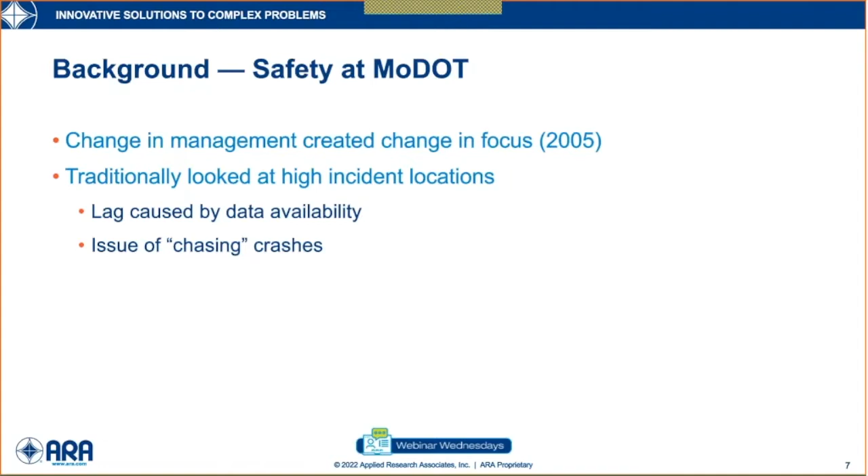Around 2005, MoDOT had a change in management and a bit of a change in philosophy on safety. They wanted to focus more on fatalities and not as much on crash frequency. You can have a lot of crashes in certain areas that don't result in fatalities, but they really wanted to reduce the fatals. I believe at the time, in 2005, they were at about 1,250 fatalities a year on Missouri highways, and they set a goal to reduce that below 1,000.

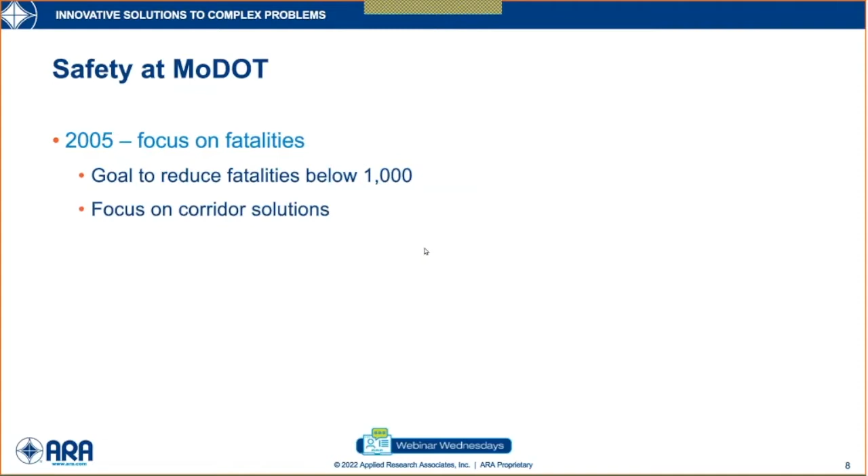The first thing they started to look at was a different philosophy: corridor solutions rather than spot locations. A lot of crashes are random events. You may have a car that runs across the median and hits another car on an interstate, but if you rush out and put up a barrier at that location, what are the odds that it happens there again? The circumstances were just such that it happened, but it may never happen at that location again.

So they decided to focus on corridor-wide situations, like putting median cable down the center of every divided highway. They started putting rumble stripes and rumble strips on the sides of the pavements, went with improved striping, and wherever possible did shoulder additions. The median cable was a big deal because that was something you could do in a year or two with a few contracts. The rumble stripes and shoulders weren't done as individual projects, they were improvements put into policy, so whenever there was a resurfacing project, you upgraded as much as you could. I won't say they did it everywhere every time, it depended on the situation and right-of-way, but wherever you could, you improved them.

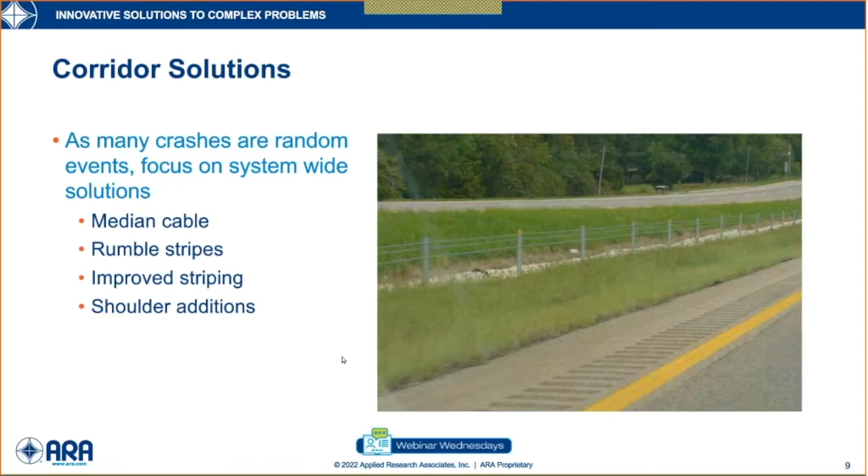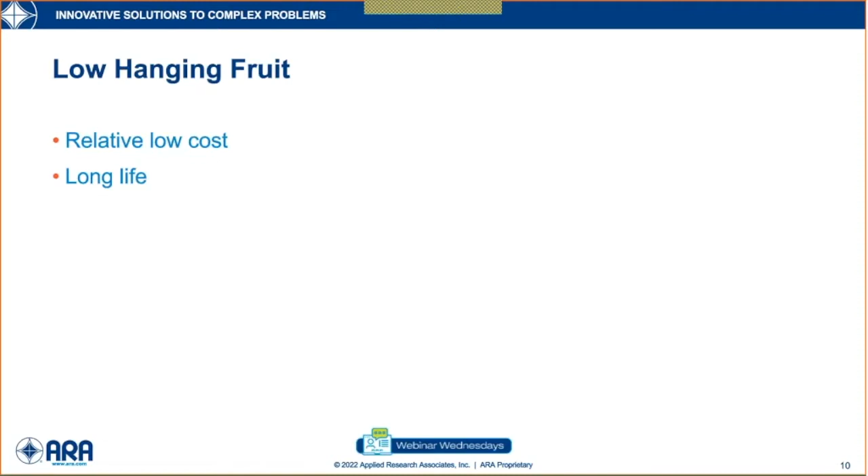You can see an example here where they have the median cable, the rumble strip on the shoulder, and the wider striping. These are relatively low cost and have a relatively long life. The cost on something like a median cable, once it's in place, you don't have to do anything with it until it's hit, and then it has to be repaired, but it lasts a fairly long time. Most of the other improvements were associated with the pavement life. When you put new pavement down, an overlay, you put in the rumble stripes, and they pretty much last as long as the overlay.

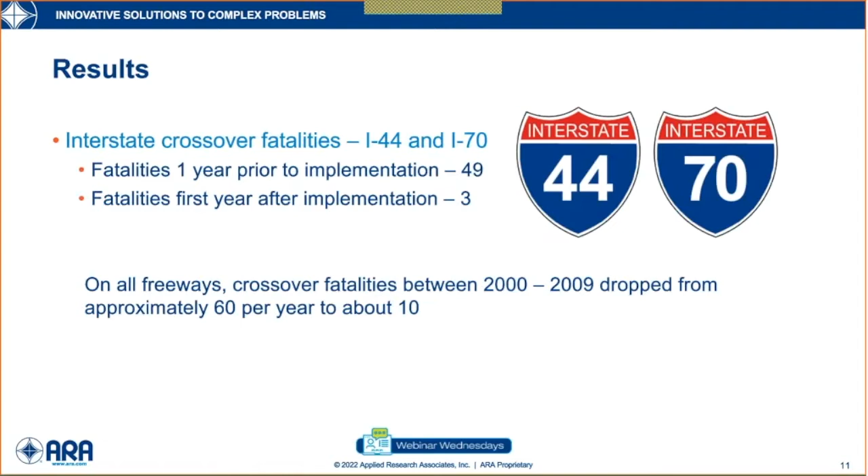As an example, I-44 and I-70 through Missouri, east-west routes, the longest routes in the state interstate-wise, we were seeing an average of about 50 fatalities a year from crossover incidents. The year before implementation, there were 49. The fatalities the first year after implementation dropped to 3 on those two routes. For all freeways, crossover fatalities dropped from 60 a year to about 10 during that 9-year period. Quite an improvement using that kind of facility.

Again, the addition of a 2-foot shoulder and rumble stripes dropped fatalities on 2-lane undivided roads about 45% and dropped disabling injuries about 25%. A nice reward for the effort there.

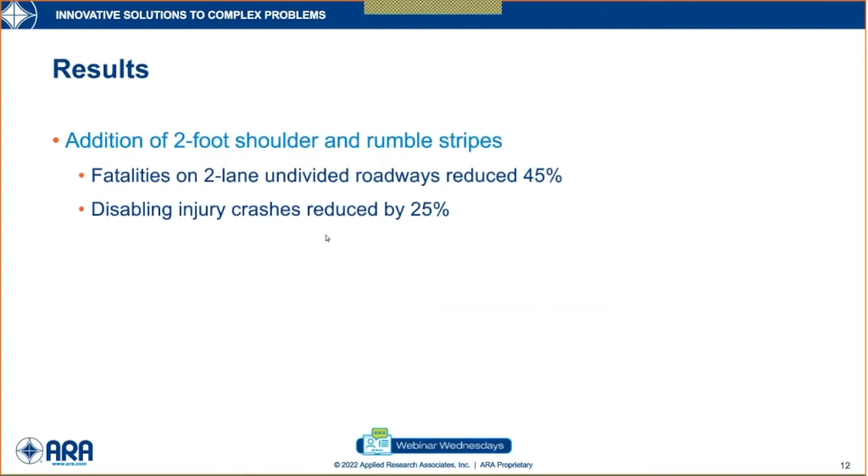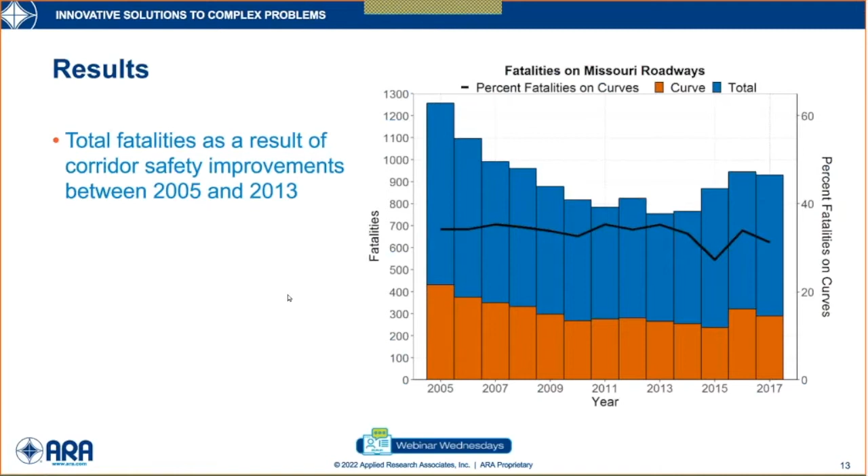I believe it was 2013 when Missouri was granted a project from Federal Highways for Life, using high friction surface treatments on Missouri highways. The purpose of the Highway for Life program was to compare experience using new programs, products, and innovative ideas to decide if they work, and if they work, whether they're the best solution based on cost benefit. In this case, they were comparing the cost of a traditional friction solution, like microsurfacing or ultra-thin bonded wearing surface, to the high friction surface treatments, to see which was the best solution.

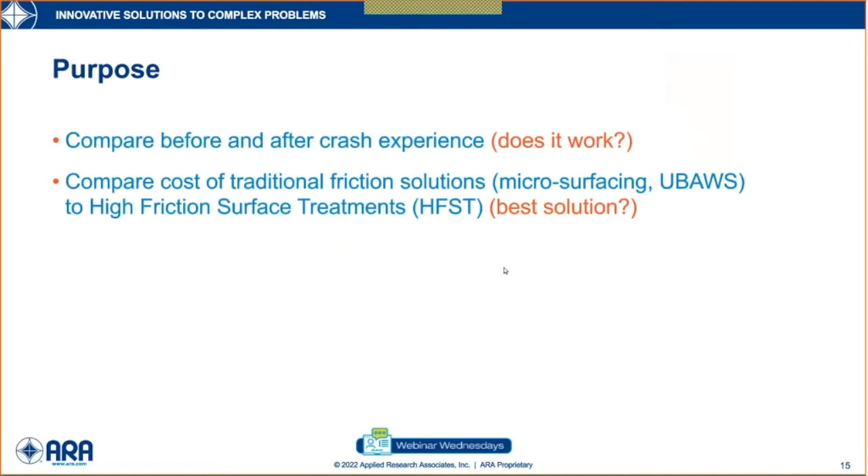Low numbers are very low friction, and they go up from there. The more friction you have, the higher the number. Let's put it that way.

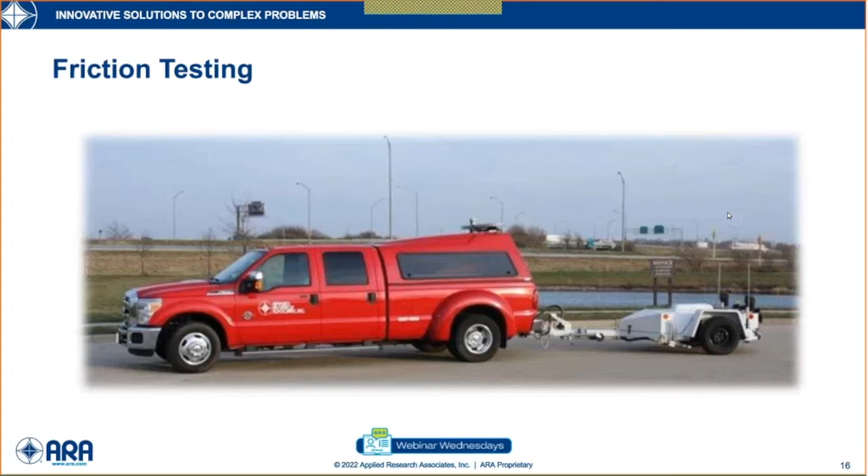The project originally consisted of two projects at 4 locations. The first projects were in Cole County, where Jefferson City, the capital of Missouri, is located. The other two were along I-44 in Phelps County, kind of in the south central part of the state.

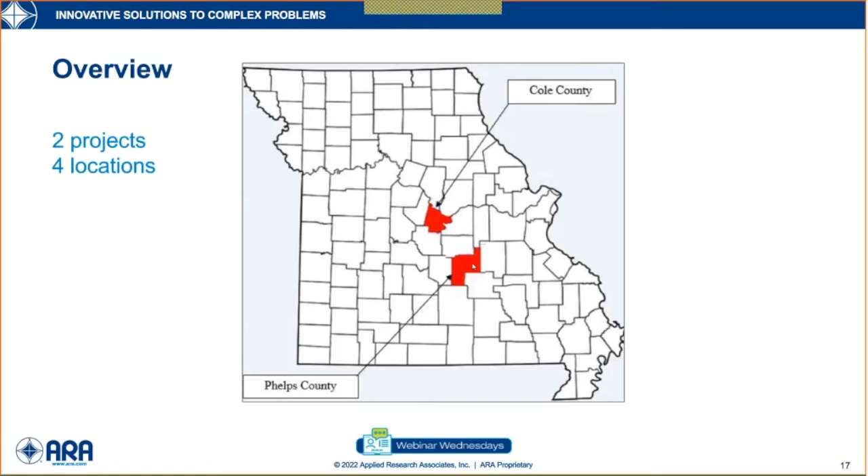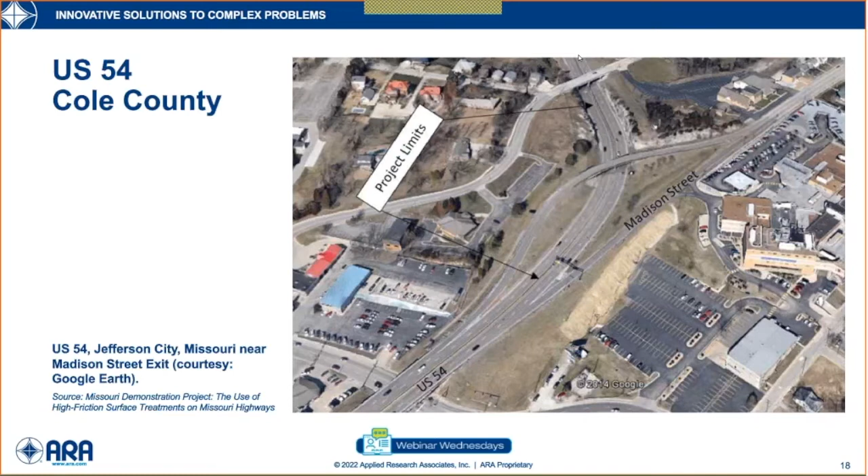The Cole County projects had 2 locations. The first was a sweeping curve just as you enter Jeff City from the west on Highway 54, right at the Madison Street exit. The second project, down the road about 2 miles, was on Missouri 179 where it crosses 54. This was more of a tangent section.

You had a couple of locations where you were having issues with rear end collisions right at this traffic light coming down a little hill. And again at this point, and a little bit on the ramp coming off of 54 onto 179.

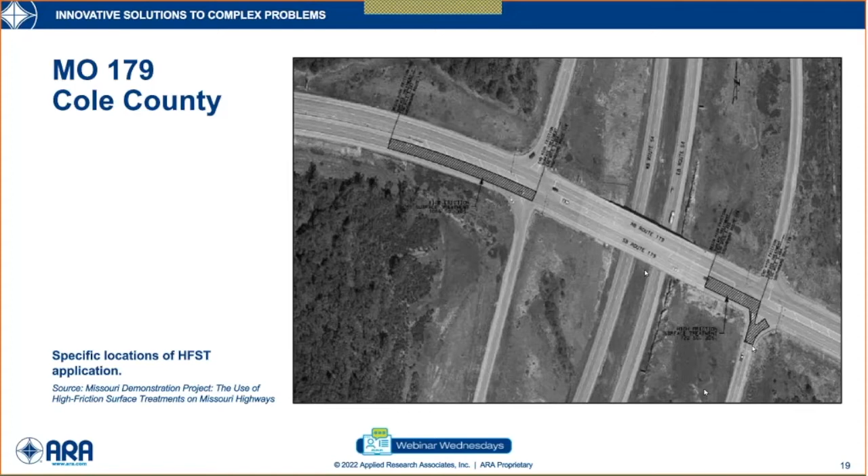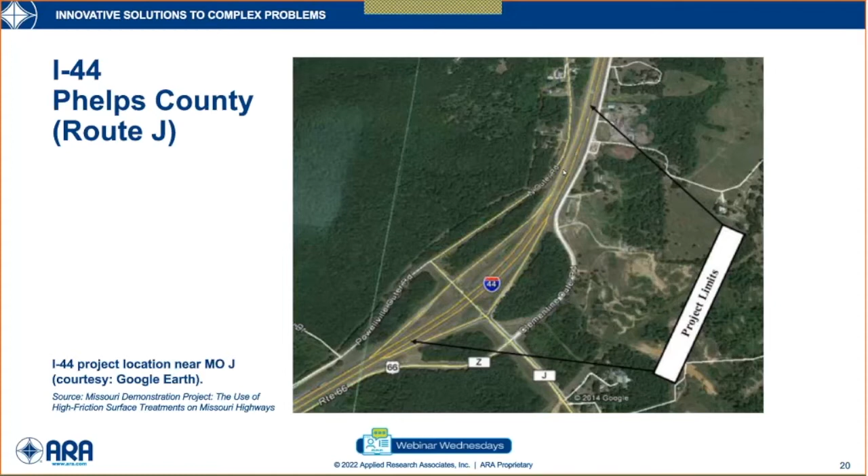The 2 Phelps County jobs were a similar kind of situation. These were interstate projects. One is just a little sweeping curve around the Route J exit ramp. The second one was down on Route V. This is a longer project, and it involved treatment through the areas where we've had some incidents with people entering and exiting 44 from Route V.

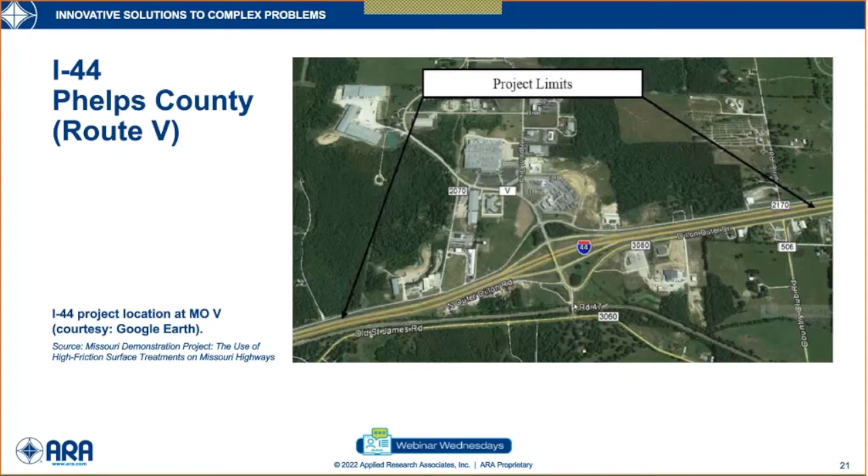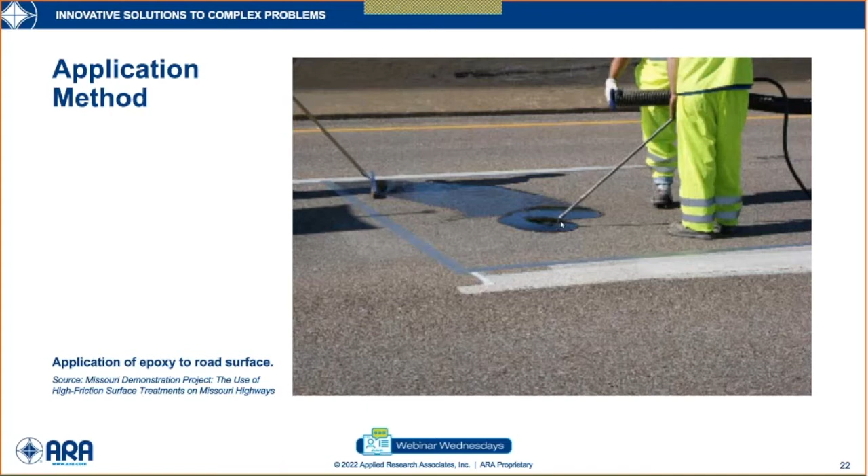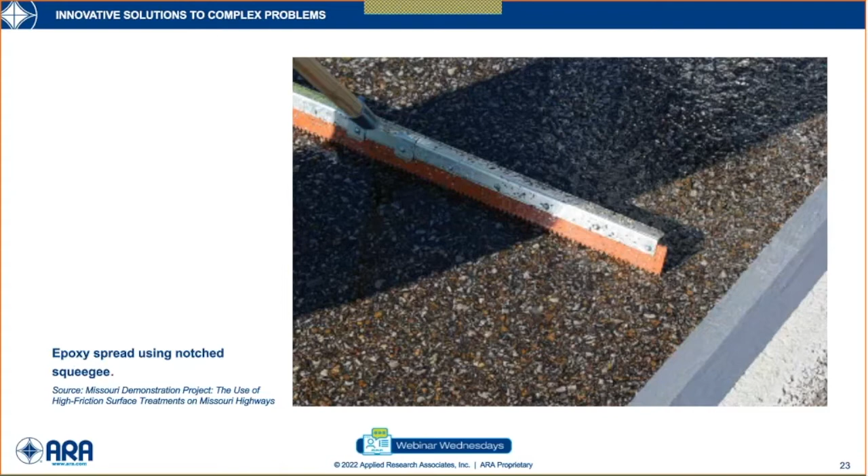Once that's applied, it is evenly distributed over the surface using a notched squeegee to get everything to a consistent thickness. And then the chips are applied.

In this case, this is bauxite - it's the ore from which aluminum is refined. This is one of the methods for applying the chips. I can only describe it as, if you've ever blown insulation in your attic, it's kind of the same principle - high volume of air picks up these chips and blows them. You can see the guy has his hand over the end of the tube, and he's using that to direct the chips down onto the epoxy surface.

It's important that the chips cover all the epoxy, but the depth isn't critical, because once it sets, those are going to be swept up, and anything that's loose is going to be taken away.

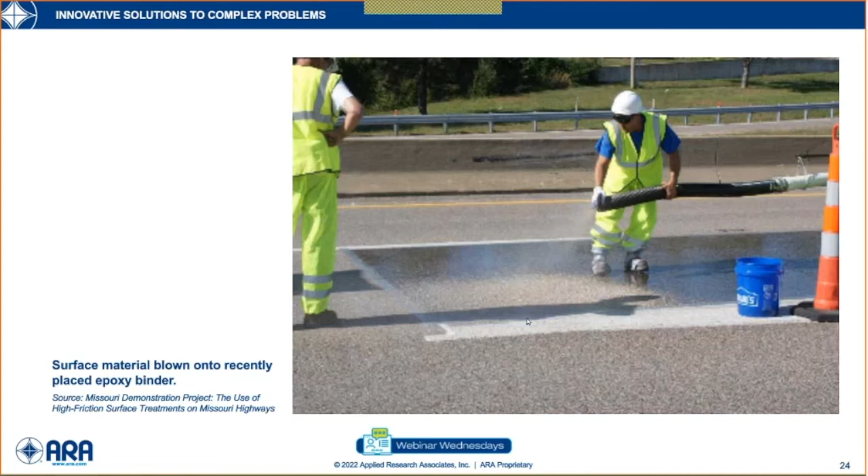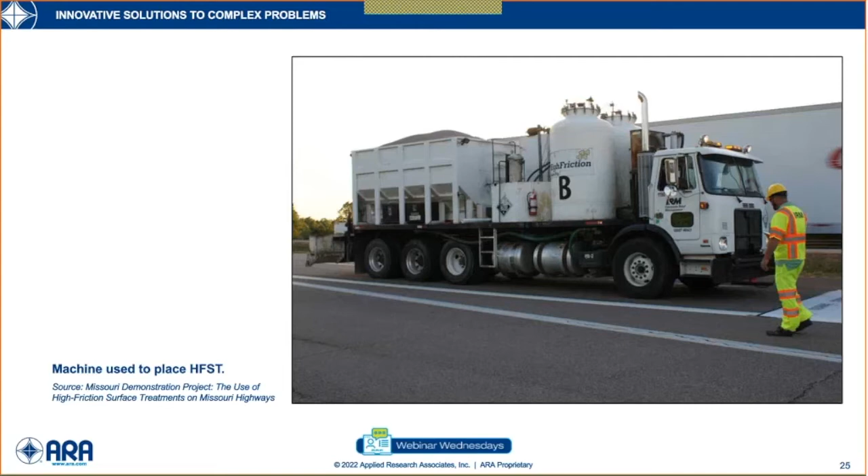The second method is a little more exotic. It's used more for longer sections. You have a single vehicle - here you see the two tanks carrying the epoxy resins. It's mixed in a mixer in the center, and then you have a bed that contains your chips, and it's all put down from this application bar in the back.

The epoxy is sprayed down onto the surface immediately before the chips are dropped. Again, it's not terribly critical how thick they are, because whatever doesn't embed in the epoxy is swept up. You'll see here a little bit of a gap where the guy's maybe not driving as close to the line as he could, but there'll be a couple of people following the truck with buckets and shovels, and anything not covered will get covered by hand.

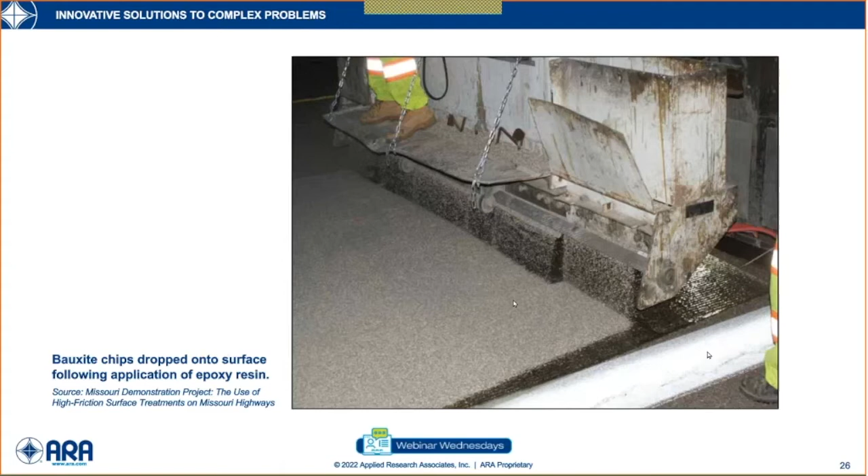The resulting surface is a really nice looking surface. The chips are all about the same size, and it just makes a nice looking product once it's applied.

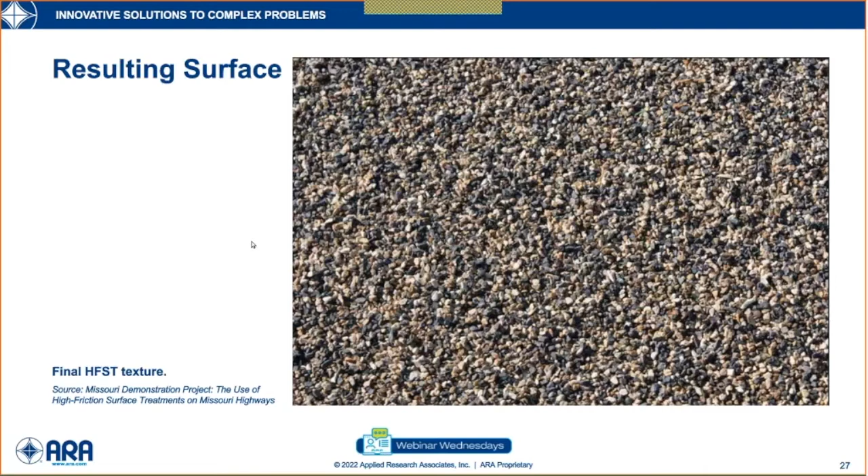As I said, the binder is all 2 component epoxy, and bauxite was the aggregate used in all of these projects. Bauxite, when you heat it, becomes very, very hard. On the Mohs hardness scale, a diamond is a 10, bauxite's a 9, so it's a very hard aggregate. You get very little wear.

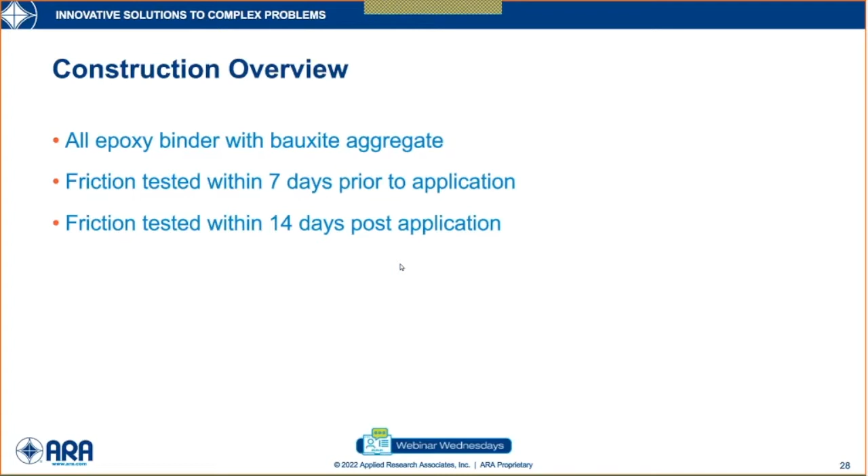The friction test was required within 7 days of application, and then another test was required within 14 days post-application. There were some specs on what that post-application number had to be. I'm not sure, I don't remember what the minimum was, but it was always exceeded on these projects.

The friction prior to the application was in the mid-30s. After the application, we were seeing numbers in the mid-80s, and it remained greater than 70 until the project was replaced about 6 years later. Now, excuse me, I'm talking specifically about the 54 Cole County location here, because that's the one we have the most information on.

So prior to the application, I believe in the 3 years prior, there were right at 100 crashes. There were 32 the year before application. Post-application, we only had 1 year's data before the report was completed, but that had dropped to 5.

And I can tell you that's a conservative number, because I looked at the reports, and 2 of them, I believe from the description, actually occurred on the ramp prior to the application of the treatment, but they were logged to the main line by the reporting agency, so we had to use them there, even though I don't think that's where they occurred.

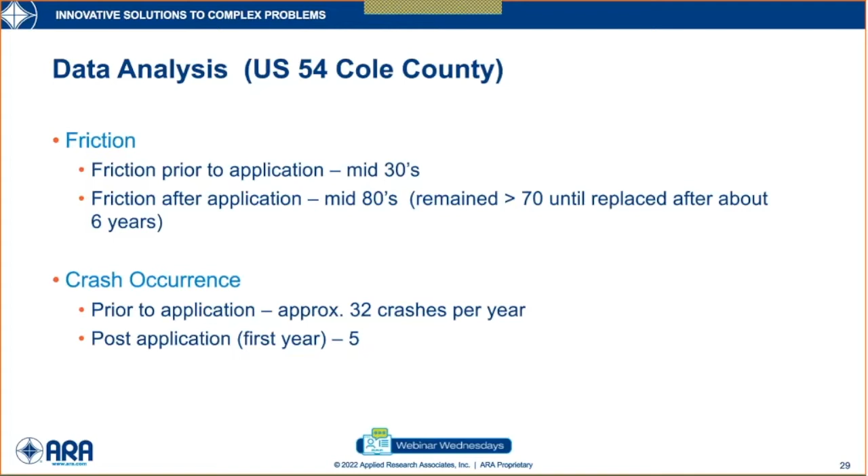And one of the other accidents, I talked to the highway patrolman, and he said in that case the crash occurred when somebody went through that curve at over 100 miles an hour. So I'm not sure there's enough friction in the world to save you from that one.

As far as the cost is concerned, the way we approached this was to look at the National Safety Council estimates. They have estimates for the costs associated with each type of crash, whether it's fatal, disabling injury, or property damage. And we had the information from the types of crashes that were occurring at these locations. So when we looked at that, we came up with a weighted average cost of about $36,000 per crash.

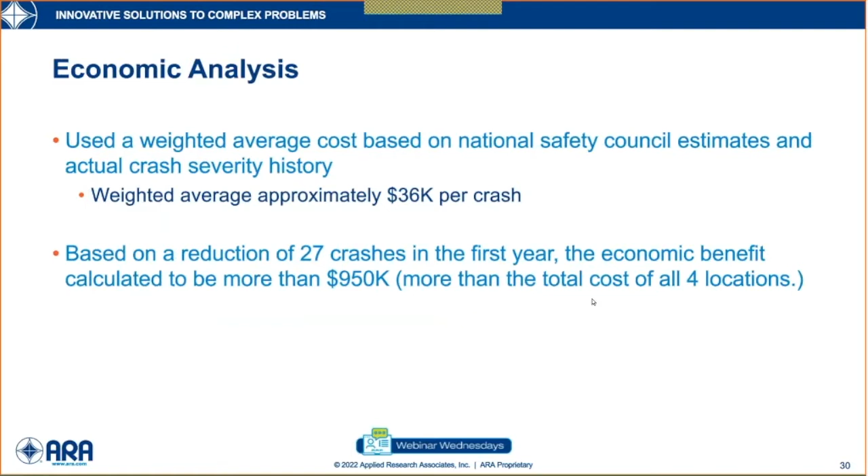And when you look at the reduction of 27 crashes in that first year, the economic benefit calculates out to be more than $950,000, which was more than the total cost to apply the treatment at all 4 locations. So that's a pretty good return on your money.

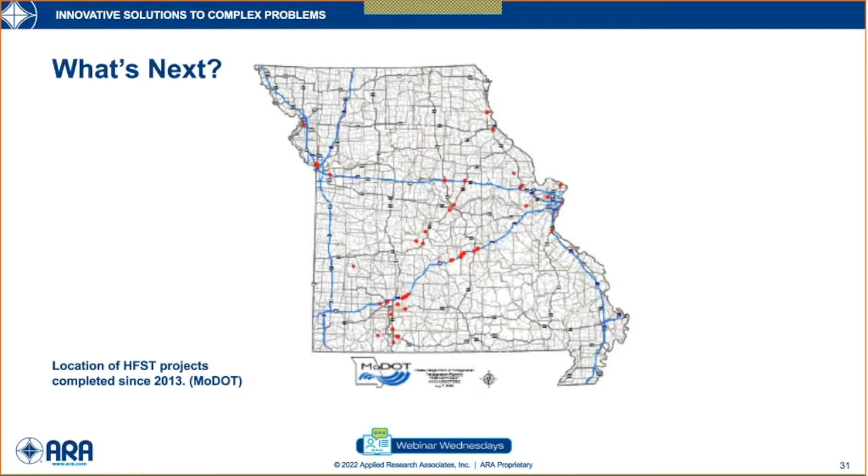So once word kind of got out that this stuff was available and how well it worked, MoDOT started using it a lot more actively at different places around the state. It's kind of hard to tell on this map, it's a little fuzzy, but all the red dots are locations where the treatment was applied after that first project in 2013.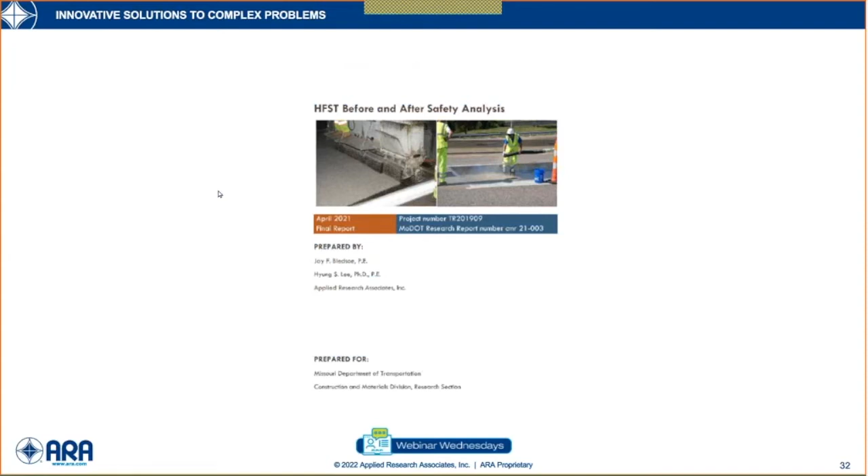At that point, Missouri decided that, well, now that we have more information, let's see if we can do another project to analyze the safety before and after on these locations. That project was finalized in '21. ARA was also the contractor on that. And the purpose was similar in some respects to the Highway for Life program: is this effective where it's placed? Does it reduce track crashes? And is there a high benefit to doing so?

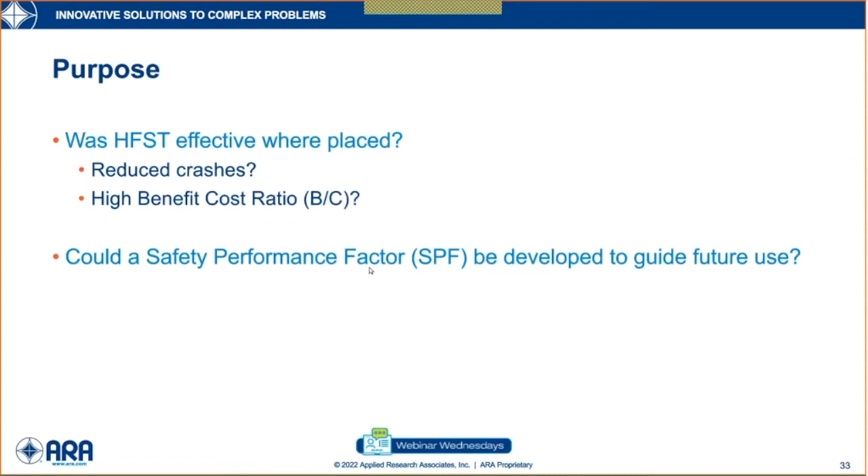It also threw in another factor, which is, could you come up with a safety performance factor to help guide the use in the future, where we weren't just doing it based on hearsay or just a number where there was assumed to be a problem.

The project that they gave us, there were 27 projects statewide, which turned out to be 67 locations. And I thought, oh, that's a lot of locations, that'll be a pretty good data set to work with. Then as we broke it down a little more, some of those locations had 2 or 3 segments in them, as they went around S-curves and whatnot, they would be broken into 2 or 3 segments. And so we ended up with 95 individual segments, which again, we think, oh, that's going to be good, that's going to be a lot of data.

But then we started breaking down the segments by type, and we see first that 76 of them were on the main line, but 19 of them were on ramps. And ramps are troubling for a couple of reasons. First off, at that time, I believe it's changed now, but at that time, crashes were only reported or logged to the ramp, not to a location along a ramp. And in some cases, the entire ramp was treated, but in others, maybe only the first couple hundred feet where the ramp exited from the main line or before it entered back onto the main line was treated. So anything that happened in between those 2 points was also thrown in the mix, so it made your data a little less accurate.

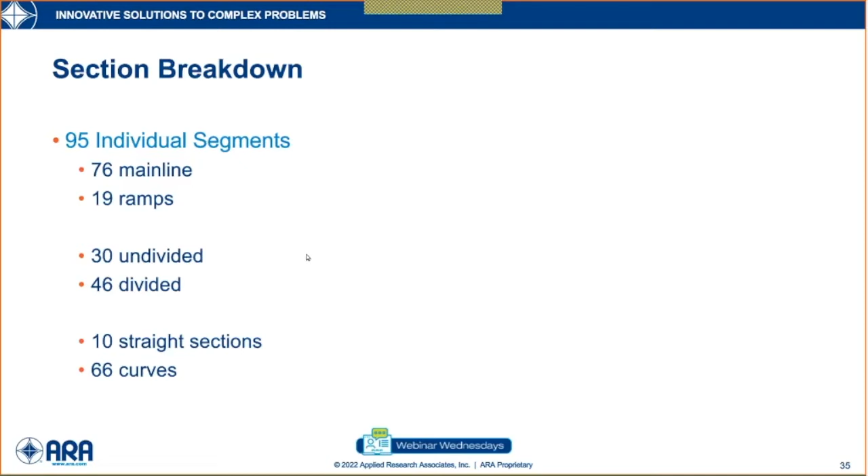A further breakdown: 18 of them were on interstates, 25 on U.S. routes, 17 Missouri routes, 15 RTs, and 1 business loop. For those unfamiliar with the MoDOT system, they have 32,000 miles. These routes, especially the RTs, are probably county roads in most states.

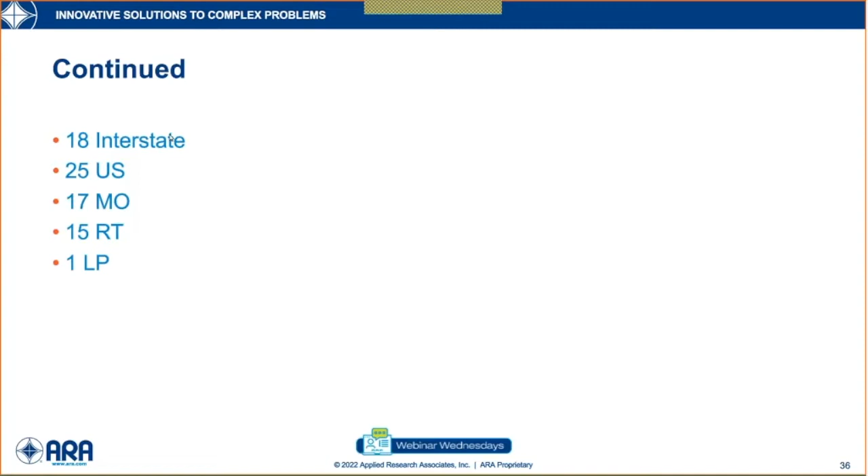So the variation in traffic between these interstates and these rural routes is pretty dramatic. This slide is probably a little bit out of place, but we'll do it here anyway because that's where it is.

When we got the list, we started looking at it, and we needed to verify the locations where the treatment was and get exact log miles and whatnot before we asked MoDOT to supply a lot of data for the analysis.

So they have an automatic road analyzer, an ARAN. They've had them for years, I think since '87, and I think they have two now. For those not familiar with it, it's a data collection vehicle that's part of their asset management program. They can collect rutting, roughness, IRI, and all the geometric data is collected.

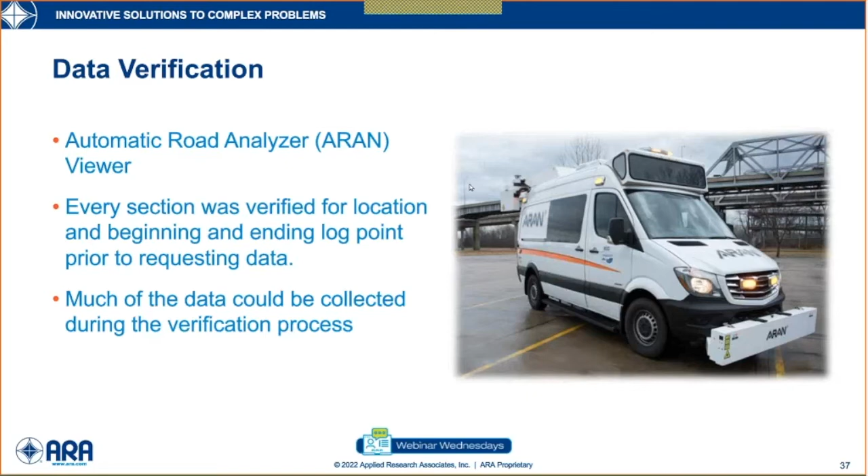They also collect video for processing and surface distress data. For what we did here, a lot of what we used was the data from the camera sitting above the rear view mirror, which gives you a right-of-way view of all the roads they travel. They collect all 32,000 miles every year, so they have a nice set of data to look at.

The data you get from that is available through what they call their data zone. When you open that product up, you'll get a map of the state, and you pick where you want to look. So we had these locations and descriptions, and we could zoom in to a specific location like this, for example.

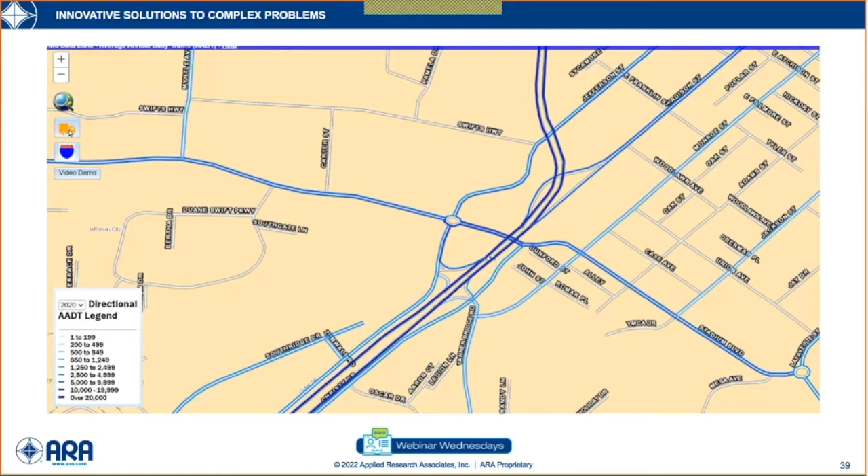Here's your Madison Street exit off US 54. This is the curve that we talked about earlier. You go up here to the left and click the little yellow truck, and by magic, here you are at the Madison Street exit. You can see the exact point the treatment starts, drive down the road, and see exactly where it stops.

You can do that by year and go back several years. I don't know how far back you can go, but it's several years. So if you want to see what the condition of the road looked like before you applied the treatment, you can do that.

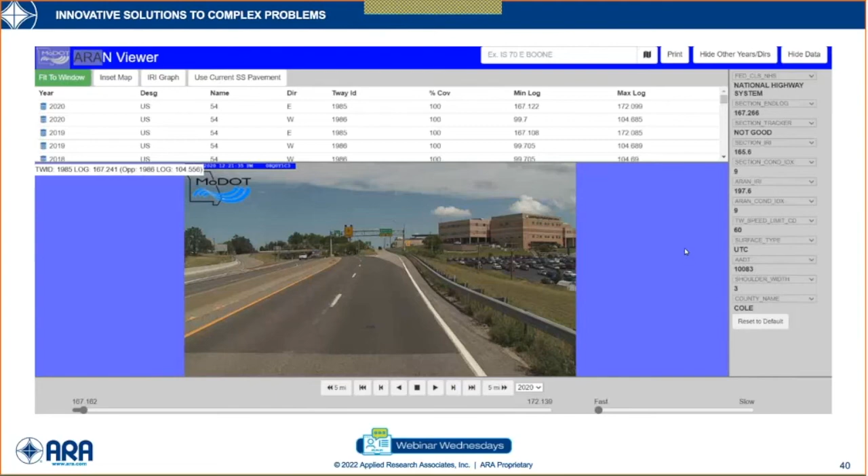In addition, some of the other data we wanted to look at was available on this drop down. All these little tabs have drop downs where you can select other types of data. For example here, we've selected speed limit, so we can sort these out by speed limit, by surface type, get traffic volumes, conditions—lots of information available on these screens.

In addition to that, through the miracle of Google Earth—as I said earlier, I think MoDOT doesn't have a friction truck, but ARA has a contract providing friction services for MoDOT—we could take our GPS tags for the numbers and look at, again, exactly where the treatment starts and exactly where it ends.

This is what I was talking about earlier, on this ramp, where only a portion of the ramp was treated. But here you can see where the treatment is applied the full length along the clover part of the cloverleaf. So we were able to see exactly what we were looking at as far as the numbers were concerned.

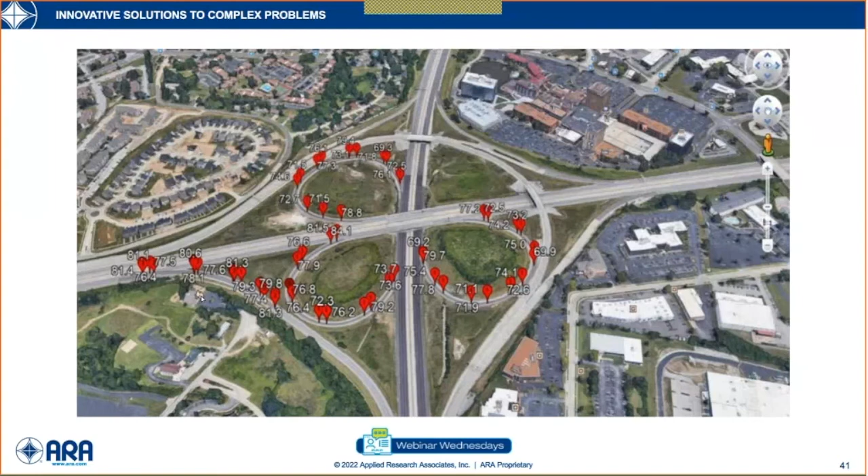So once we had our limits all established and whatnot, we asked MoDOT to supply us with crash information, and we found 1,829 crashes that were identified within these project limits, both before and after the treatments were applied.

We had all the detail on those as far as whether they were fatal, disabling injuries, or property damage only. They also supplied all the data requested on roughness, rutting, cracking, curvature, super elevation, AADT—the whole shebang.

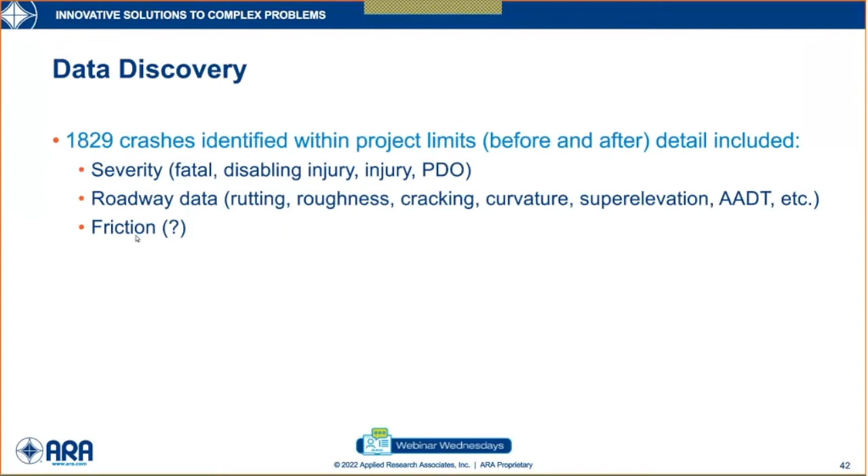This is where we were a little shaky here on the friction. There was very limited friction data prior to the application of the high friction surface treatments that we were looking at. Only 8 of the locations out of the 67 had data prior to application.

So we used what we had, and that gave us a before estimate of about 35 on those locations, and an after estimate of about 78. So those numbers are pretty close to what you saw on the Highway for Life program. That one was a mid-30s before and a mid-80s after, so it was a little bit higher.

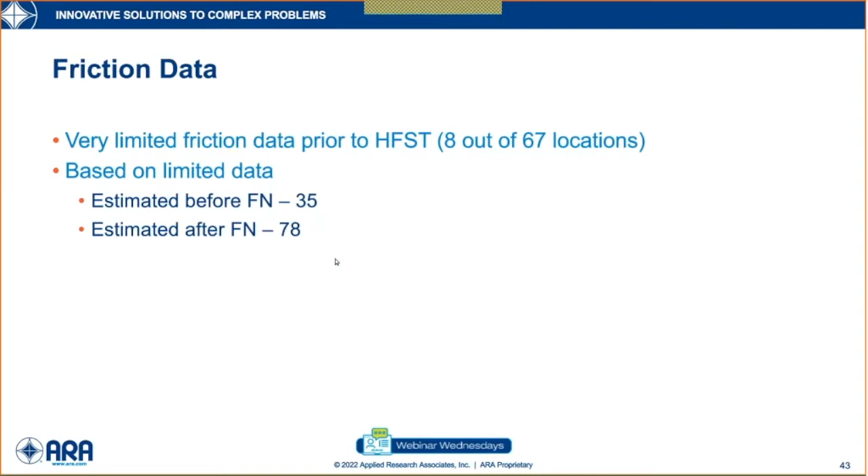But I will say the average on the after was a little more variable when you had this many projects. We had a small sample that had multiple years of data prior and post, but we took what we had, and here's an example of a couple of the locations that we looked at.

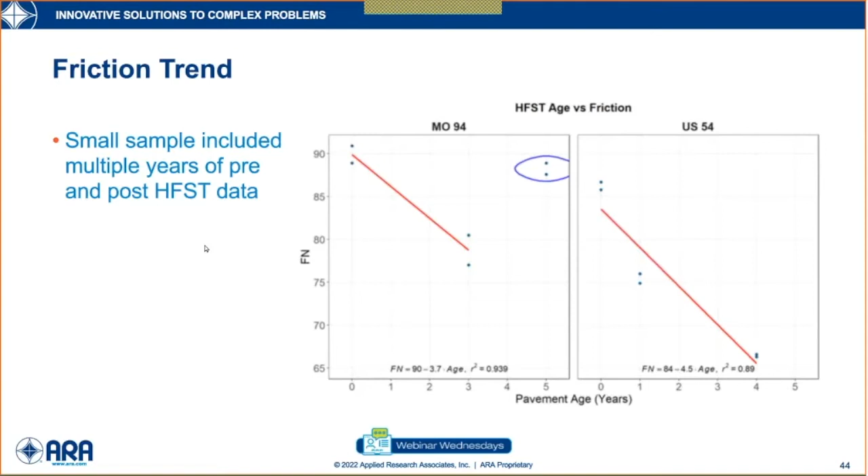We were able to get a rough estimate of how long the friction lasts, and last is kind of a bad term too, because there's really no bottom cutoff for it. But we wanted to see what the average drop in friction number per year was. Using those curves on all the data we had available, we saw an average drop of about 4 points a year.

So again, what's the life? That's a tricky thing to say, but if we assume that starting point of 78 that we saw as an average, and you assume a 4-point drop a year, in 7 years you're still over 50, or about 50. And I don't think anybody's going to argue that 50 is a pretty good number.

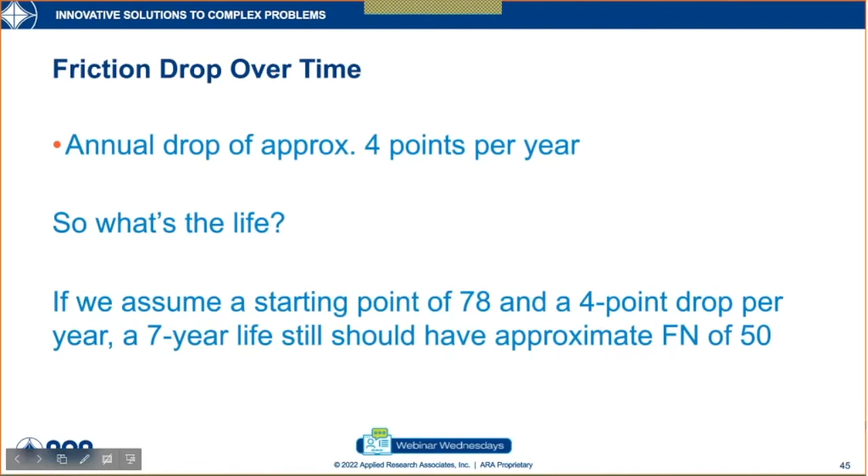We assume the 7-year life because, in a lot of cases, that's probably the average life of your overlays. Some places longer, some places shorter, but if we use that for an average, we thought at that point something else is probably being done to the pavement regardless, because in most cases they're not new when you put them down anyway.

So of the 1,829 crashes we saw, 1,425 were before, 404 after. So you saw a 72% reduction, but you have to be careful here because not all the projects were placed at the same time. Some of these you saw several years with the treatment in place, others less than a year. So that's a little bit misleading, but I'll show you in the future how it's not that bad an assumption.

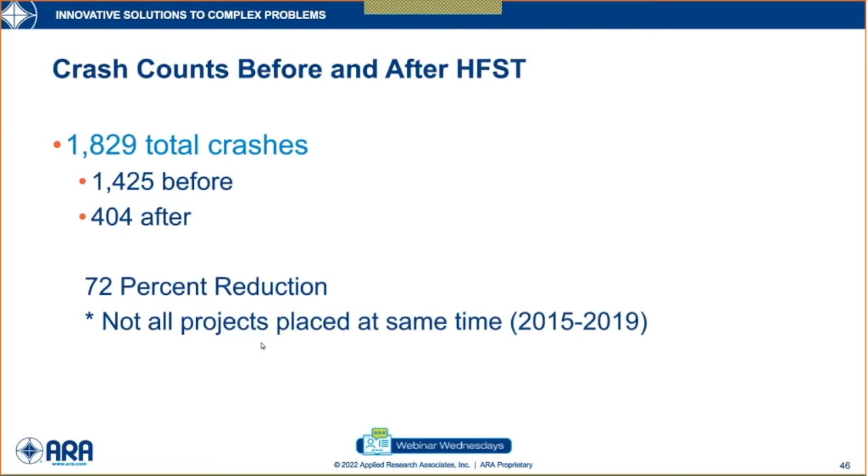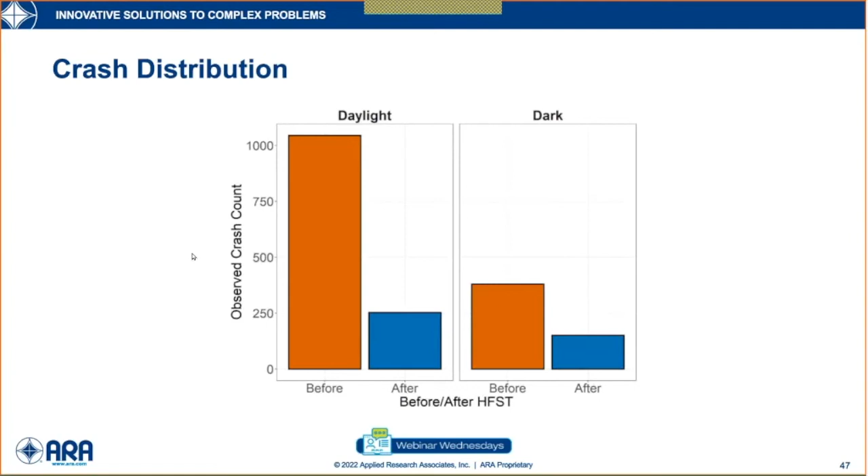The distribution, that's another nice part of the data set. We could look at the distribution between daylight and dark and the observed counts before and after, and you see a pretty good reduction both ways, but more of a reduction in daylight hours.

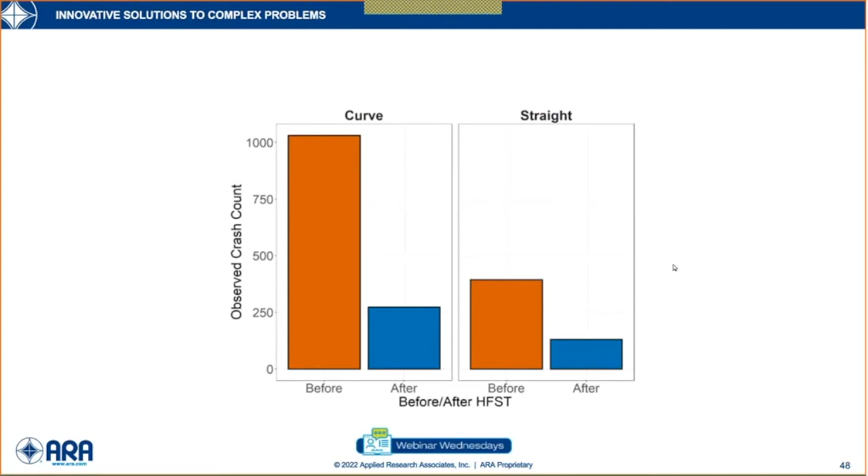Straight versus curved, again, you've got a lot more data here than you do on the straight sections, but again, you'll see a much greater reduction on curved sections. Dry versus wet, this is one of the biggies. The reduction on wet surfaces, as you would expect, was significantly better than on dry surfaces.

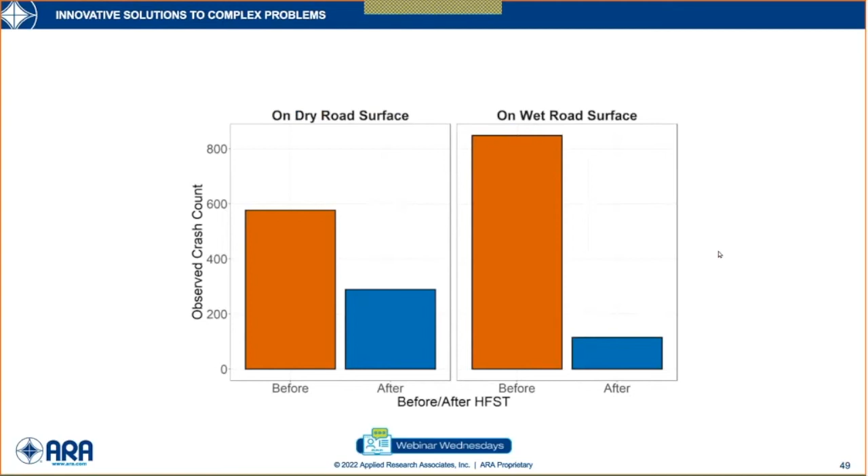As far as the benefit cost analysis goes, we used the same method that we used in the Highway for Life program. We did a weighted average cost based on MoDOT cost factors and calculated based on the distribution of severity on each of the locations. We calculated an annual crash cost for each section, not overall, but for each one, and assumed a 7-year life.

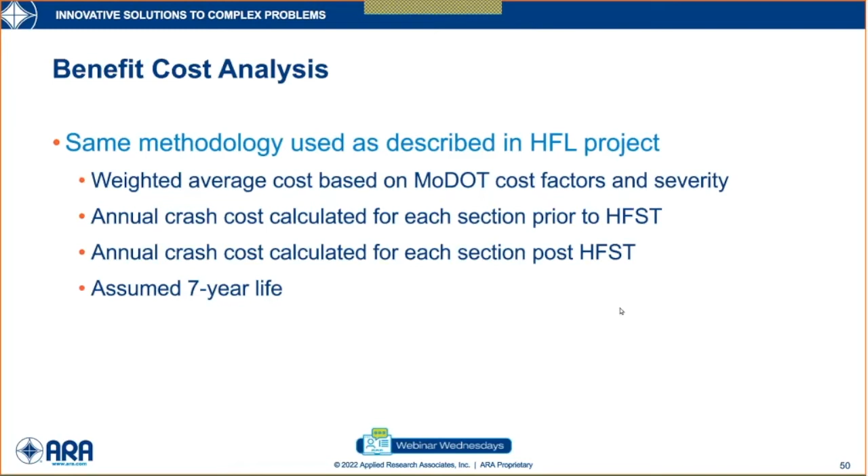So of all the projects, these are all the jobs that were done, and some of these, again, had more than one location, but these are the jobs. You can see that for the most part, there were some pretty nice reductions after the application of the treatment. But you can also see that some locations had significantly higher numbers of crashes before the treatment than others.

Some of these, where you get down in these areas, had very few crashes to begin with. These would be some of those really low volume roads. So you see a reduction, and maybe that's a 50% reduction, but there's not that many crashes. So when you go into looking at your benefit cost, overall it makes things a little more complicated.

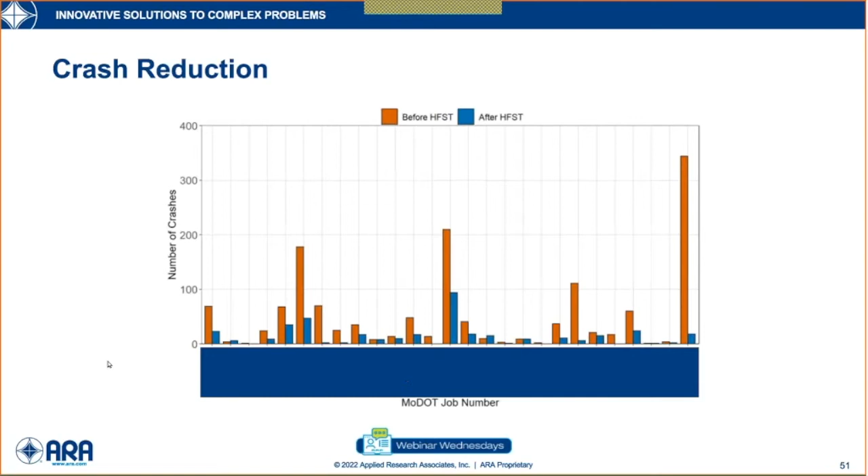Now, we've talked about the costs quite a bit, and I haven't really said much about how that was calculated. These are the numbers that came from MoDOT that they used in their safety program, and they've assigned these values to different types of crashes based on national data. So you can see property damage only accidents don't cost too much compared to the more serious accidents.

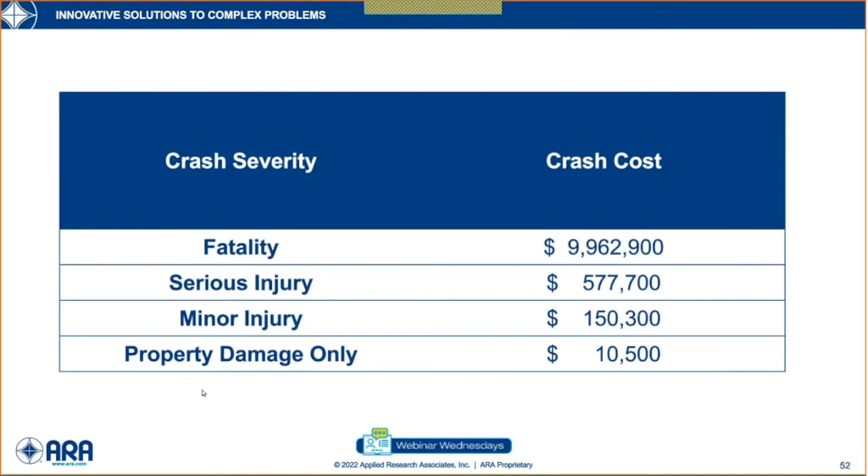Again, it depends on the location, but getting an extra one of these into your mix can make a big difference in your benefit cost ratio if you have a low number of crashes. And that's kind of what you see here.

This is your benefit per year in millions. So some of those where you had a very high number of crashes, you get a pretty high benefit. Some of these where you had very few crashes in the first place, we actually saw a negative benefit. And that can be just the difference between throwing in one extra disabling injury or injury crash to the mix when you have a very low number in the first place.

I think we all realize that the difference between an injury crash or a disabling injury crash and a PDO may be nothing more than whether the person in the vehicle was wearing a seatbelt. One person not wearing a seatbelt that has a disabling injury on these low volumes can really throw your benefits into a mess.

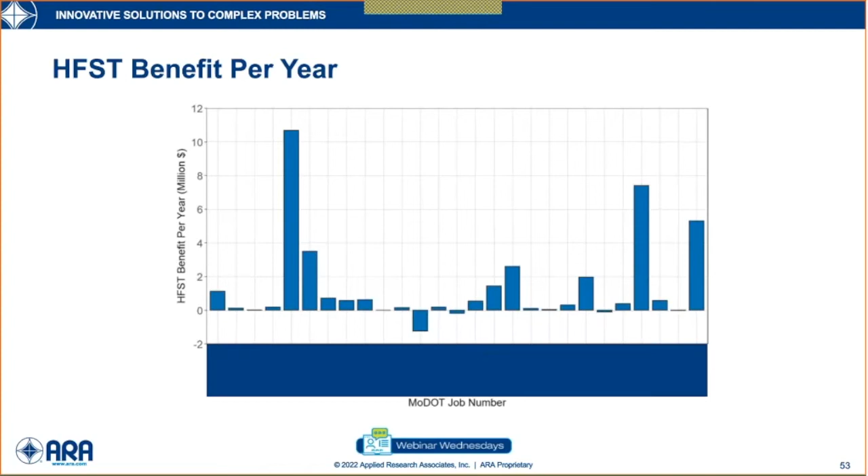So the total cost on this of all the high friction surface treatments was about $4.6 million. Some of these were individual projects just to do high friction treatments. Some were done in conjunction with resurfacing and other types of projects, but pulling out just the cost, we came up with $4.6 million.

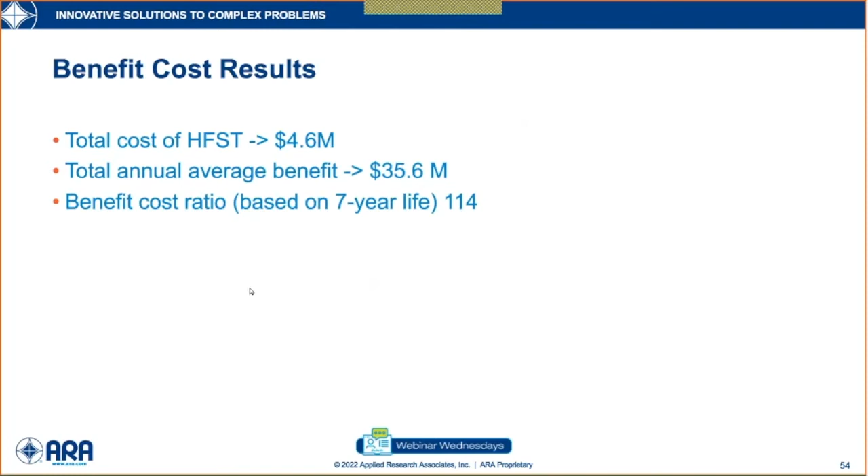The average return, or the benefit, turned out to be $35.6 million, which gives you about a 114 benefit cost ratio, assuming a 7-year life. Once again, not a bad return. What you saw before, it's kind of spread all over the place, but that's the average.

Now comes the fun part: safety performance function. This is kind of a way of using an estimate to analyze what kind of benefits you would have if you were to apply a certain treatment at a certain location.

The recommended procedures that AASHTO and FHWA use require large amounts of network data, and that just wasn't available for MoDOT. So we first looked at a generalized performance function and tried to understand the effects of friction as well as the other pavement, roadway, and environmental factors. But again, we had limited data.

There's a lot of things that could affect these. There were a lot of things being done at the same time as some of the treatments — other improvements, as we talked about earlier, like the addition of a shoulder or chevrons or rumble stripes, that kind of thing. So that made it a little more difficult as well.

So we dropped down to a very simplified performance function that included all of the section data and had a limited number of variables.

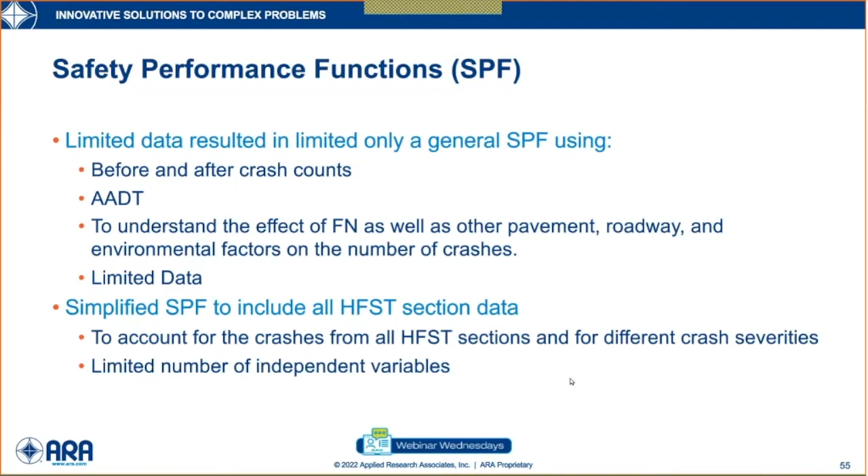Based on the data we had and the general SPF, we basically used a ratio of before and after crash counts and segmented it by AADT, segment length, and speed limit. Friction wasn't included as an independent variable because we just didn't have enough before data to really do that in a way that made it meaningful.

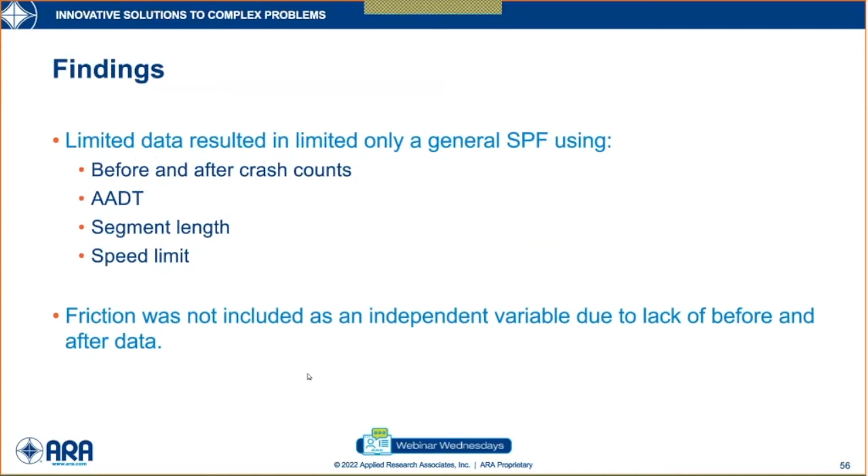So we developed a generalized SPF for roadway and tangent sections. You can see here on dry surfaces you get a benefit from the expected counts, but on wet surfaces you get a much more dramatic estimate of drop.

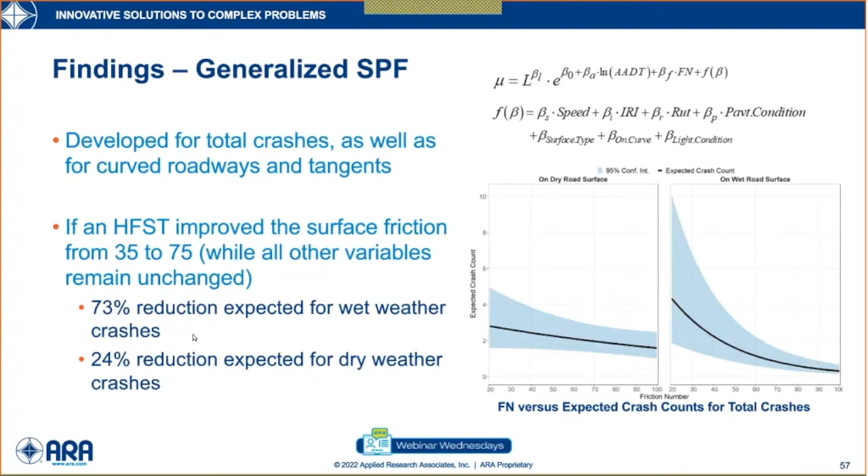If you use the numbers we had from our averages before and after, assuming all the other variables remain unchanged, we saw about a 73% reduction — expected reduction — for wet weather crashes, and a 24% reduction for dry crashes.

This one, I'm not going to pretend to understand the statistics that go into it. We have very smart people that did this part of the project, so I'm going to go into this in very little detail.

I'm just going to tell you that the empirical Bayes method was used to try to take out some of the unpredictable nature of the crashes, kind of like we talked about a while ago, where you have some very low volumes, some very high volumes, and one or two crashes of a different type can really throw those counts out of whack. So this is kind of a way of doing a weighted mean for your data.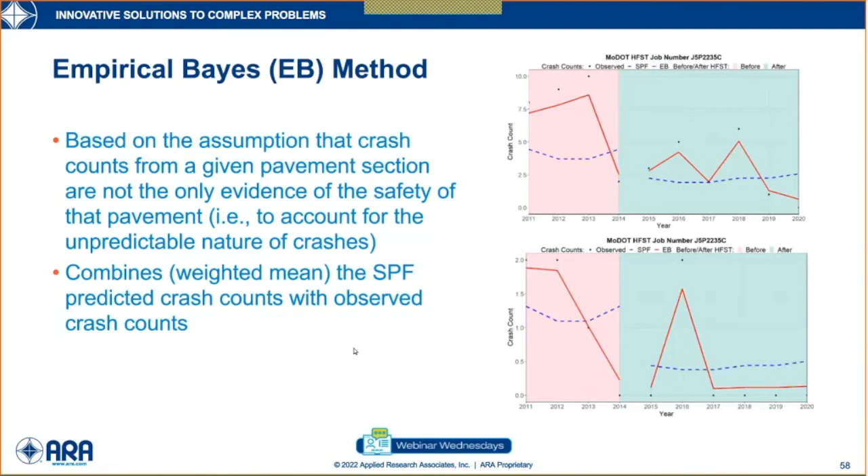If you look at some of these charts on your right, the little dots are the actual data observed. This blue line is what you estimated from the performance function, and then after you use the empirical Bayes methodology, you get something that's kind of in the middle — it kind of averages out those highs and lows, if you will.

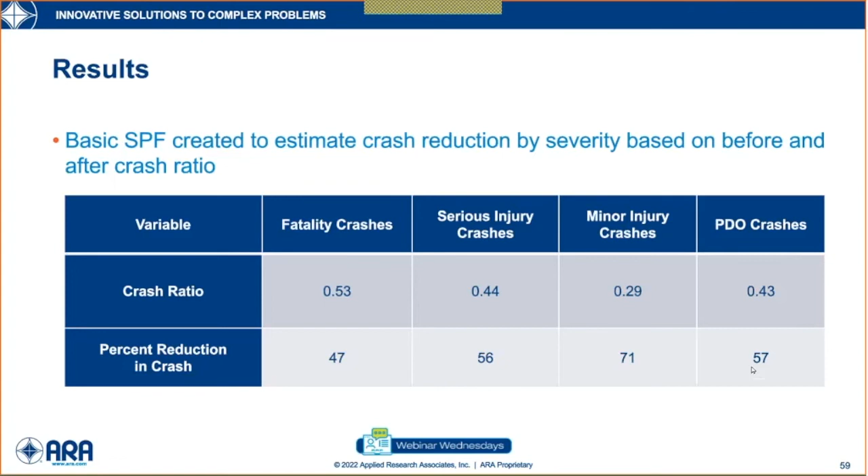So the results come back to this. We were able to come up with ratios or percent reductions in crashes that were estimated based on what we saw in the data, and we see a 47% reduction on fatal crashes.

56% reduction in serious injury, 71 minor injury, and 57 PDOs overall. So when you look at that from a benefit cost ratio, and assuming that 7-year life on all of these projects, your benefit cost ranged from a little over 2 to 409, with the average being about 60. And this is from the empirical Bayes method, where you take out some of those highs and lows.

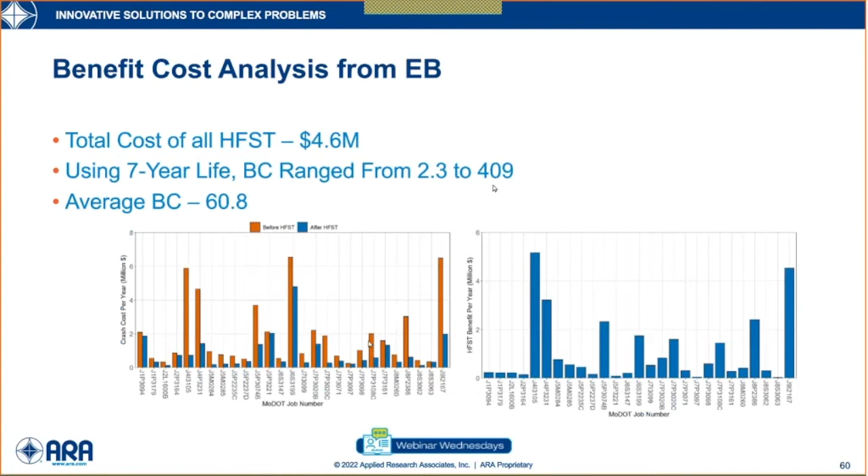So what did we really learn from this? All the treated segments exhibited a high friction post-application, the average greater than 75. That's high. It's hard to say what is good and what is bad with friction, but I can tell you that when you get up in the 75 and 80 range like this, it's enough to pull the tread off your friction testing tires.

That's good. I don't know that I've ever seen numbers higher than some of the numbers we saw in these projects. It's a very good surface. And if you look at the overall benefit cost, you're doing very well. You're doing, depending on which methodology you look at, from 60 to 114 on your benefit, which is again pretty good.

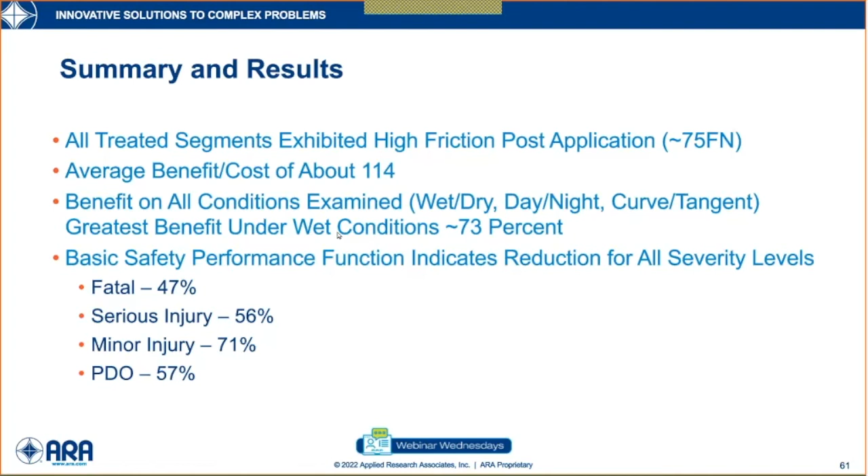And what you're really looking for is a reduction in fatalities. So that was almost 50% there. In general, you're going to see a better reduction in wet than dry conditions and on curves than tangents, and that's to be expected, kind of common sense. But your basic safety performance function would indicate that you're going to see reductions in fatal crashes by about 47%, serious injury 56, minor injury 71, and PDOs of 57 in locations where you use this treatment.

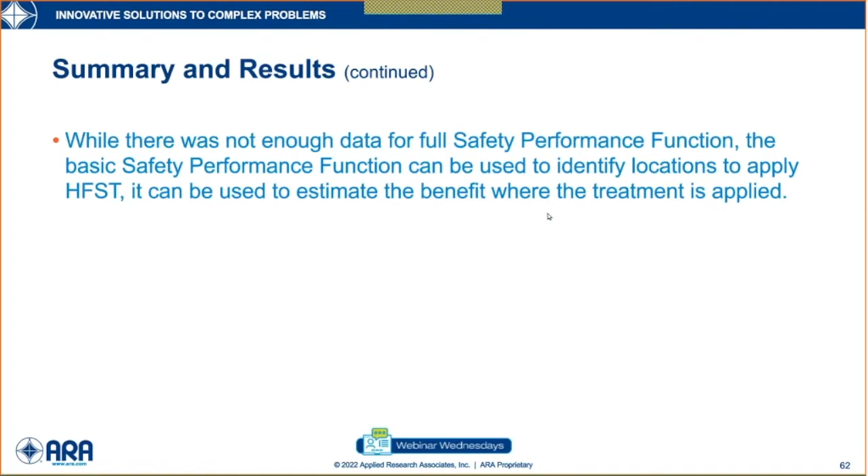There wasn't enough data for a full safety performance function the way we'd really like to have done it. It just wasn't enough data. But we think that the safety performance function can be used to identify locations to apply friction surface on an individual basis. So that's where we kind of stand. It would be nice to have more data, and that's, of course, what we always say. Always nice to have more data, but at least this is something that can be used to estimate a benefit where you're planning on applying a treatment.